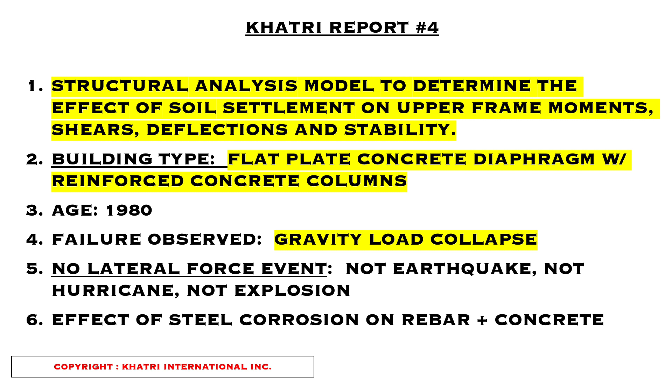And so I did this analysis mainly out of curiosity and also to follow up on a hunch that I had about 2 months ago after visiting the site, that what would happen to the building if a column were to sink. And so I did a very simplified model. I'll show it to you and share the results with you. That's the purpose of today's presentation.

And so report number 3, we discussed the effect of corrosion on steel and concrete. We discussed what could happen to the footing with a concrete pile cap. We discussed the column slab connection. Today we're going to look at what happens to the shears and moments from the rotation of a foundation settlement and the effect of settlement itself, the vertical movement of a particular column. How does it affect the rest of the building?

The results from today's analysis, it's a very simplified analysis. It's just a single frame, one story, but it has application to buildings worldwide, because the principle of the analysis shows, and you'll see it in a moment, what happens when a building settles and how does it affect the structural performance of the rest of the building.

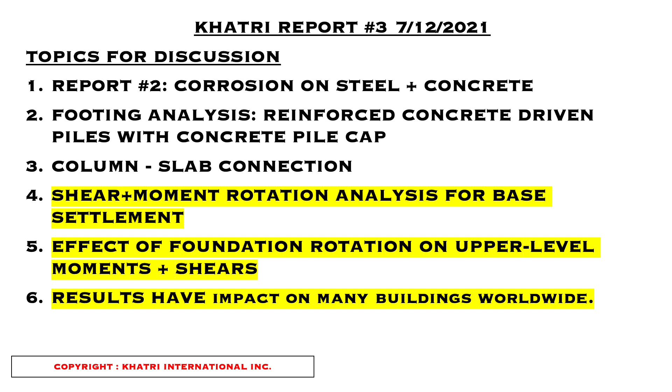We start by looking at a very simple model of a single portal frame. This is a simple moment frame system. We all studied this in college many times in our undergraduate program. And what we're going to do with this portal frame is do a very simple analysis where we will try to destabilize the frame by allowing one joint to slip.

So in the top of the diagram you see case A, which is a traditional fixed base model. In this particular case I have modeled exactly the loads that I calculated from the Champlain building for a typical tributary frame with the dimensions that I got from the plans. You have a dead load and live load on the top part of the frame for the level 1, and then you have axial loads upwards of 600,000 pounds coming from the 13 floors up above.

And you have joint A and joint D are fixed base. You see that in case A with a rigid frame. And that's a traditional analysis. That is what structural engineers do on designing buildings like this. We do the case A analysis and we design the building based upon that.

We assume throughout the life of the structure that joints A and D will never move, that they will remain stable. And that obviously is not happening, not just on this building, but is not happening throughout. As a forensic engineer, I can tell you that the joints are moving.

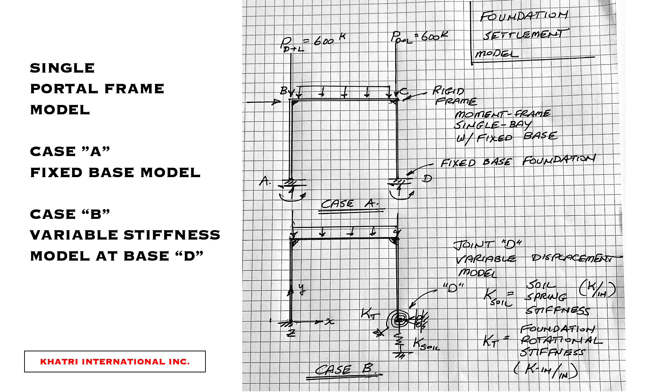Vertical stiffness is modeled using a linear elastic stiffness model. In this graph, I've shown schematically how that stiffness really looks. On the vertical axis, you have the vertical compression force on the column acting downward on the footing. Everything here is positive, but obviously in the actual model, it would be a negative deflection.

The delta Y on the horizontal axis is the vertical deflection, and the dashed line represents the actual nonlinear soil stiffness model, which most soils are very nonlinear. And we're approximating that using an ideal linear elastic curve because hopefully we never reach the nonlinear behavior. So most of our deflection will be occurring on the very far left of the diagram where the linear elastic stiffness modulus is applicable. That number would come from a soils engineer.

In the structural model, we assume that K soil is infinity. We assume it's perfectly elastically rigid, which I am now removing that assumption and putting in some linear elastic model, and I'm varying that linear elastic K modulus and degrading it. In other words, I'm starting from a very high number and then I'm reducing it until we get deflection. And then I'm seeing what happens in the structure, what happens to the moments.

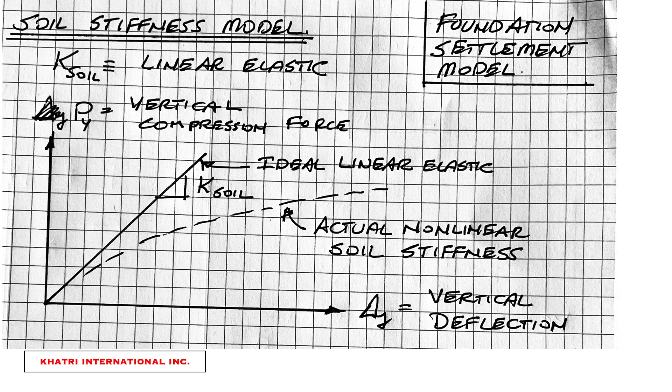And the rotational stiffness, which is the coil spring, same idea. The actual soil is highly nonlinear, and here we have on the vertical axis the moment rotation relationship, the rotational moment in kip inches versus the rotation of the foundation measured in radians. No specific numbers here because I'm only doing this analysis really to see, varying the numbers from infinity and degrading the rotational stiffness down to the point where we get some rotation, some deflection, the effect of rotational stiffness degradation on the frame.

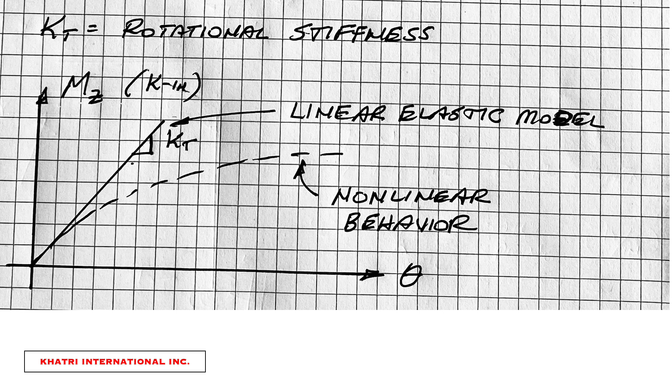What happens when joint D loses its fixity and that joint is allowed to rotate? How does that affect the other column joints? That's the purpose of today's analysis.

This is case A, which is the standard case. Fixed base model. This is done all the time. The program we're using here is RISA 3D. It's a two-dimensional model. And you can see everything is nicely symmetrically distributed. You can see the loads are 50% shared between the two base joints. The moment diagram is very symmetrical.

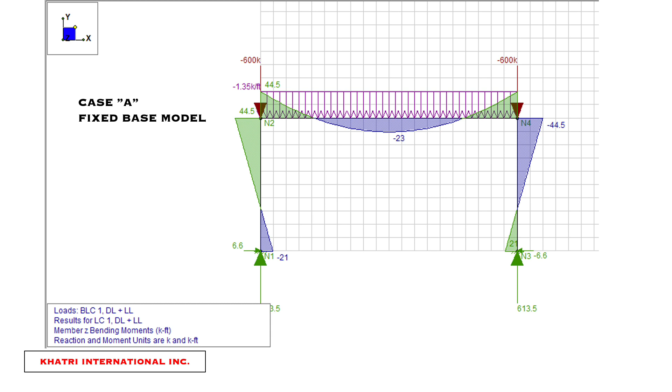But pay attention to the numbers here. I want you to look at the left corner where you see the moment of 44.5 foot kips. Pay attention to that and pay attention to the moment on the right, which is symmetrical, and see what happens as we start to move the lower right joint, letter D, downward.

In this analysis, I have reduced the stiffness in joint D, which is the lower right joint, and you see the deflections there. We're getting about 1.25 inches of deflection in node number 4, which is joint D on my diagram. And see what's happening to the moment diagram. The moment diagram has gone asymmetrical. The moment on the far left is now 58.1, whereas before it was 45, so it's increased substantially. The moment on the right joint has dropped from 45 to 31.

And what this is telling us, which I did sort of predict, is that it makes physical sense that when one leg starts to weaken, the other leg takes more load. And so that fits with human expectation. If you are walking with two legs and your one leg is hurt, your other leg is going to pick up the load. It's simple physics. The building will redistribute the axial loads and redistribute the stresses to the stronger remaining leg. Makes sense, and that's exactly what's happening here.

The problem that you have with this is that that joint on the far left is not designed for those higher moments. It was designed for a static equilibrium condition that was symmetrical. And this is where the problem occurs, because when you have the redistribution of the stress, the new loads are higher than what was there before, and now that deflection in that column is affecting the rest of the building, which will lead to instability.

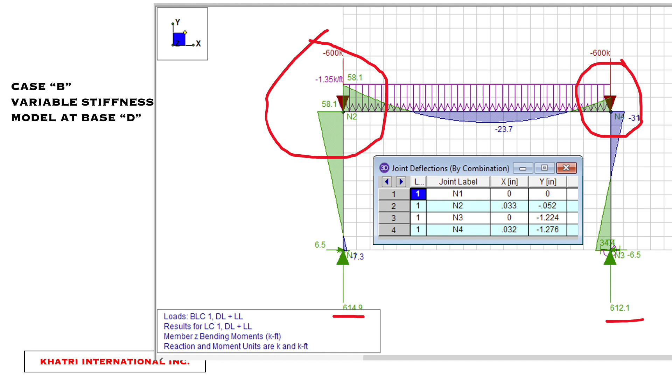And we are getting horizontal deflections, as you can see. Look at the X dimension there. We're getting horizontal drift that's occurring in the frame. So the frame is drifting to the right, which will lead to a P delta effect. Now in this case, it may be okay with only 1.25 inch deflection, but it can easily get out of hand. You'll see in the next slide.

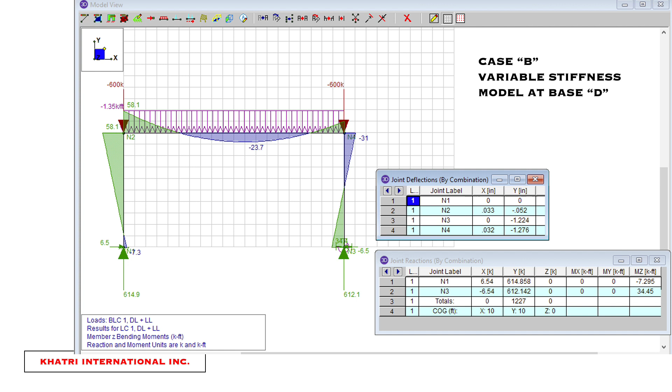This is the same case, case B. Here we have the same deflections. I've printed for you another slide down at the bottom which shows the moment redistribution. And again, you're getting asymmetry. You can see the moment diagram on the far left column has shifted dramatically, and the loads have gone up, which puts extra strain on that beam column connection, and also it affects the shear diagram as well.

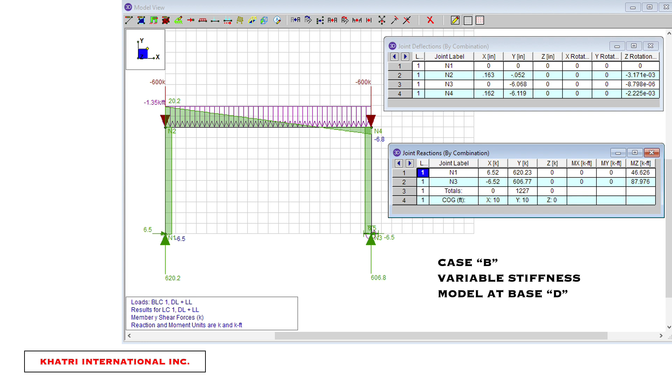This is the shear diagram. You can see the shears are no longer symmetrical, and the same thing is happening with the moments. Between the two, the vertical deflection has a more dramatic impact on the moments and the stresses than the rotational stiffness, but they're both bad, and they both lead to unstable structure.

This is a schematic diagram of the pile cap rotation, where we have the column coming in, there's a pile cap, and I've schematically shown here what happens when you have cap rotation, what happens when you have vertical deflection. These are the components that can and should be measured in a building. If we are having this issue occurring in any building, it will demonstrate itself somewhere on a diagram like this,

which can be measured. And so measurements to see if the building is deflecting are highly valuable, because that will tell us whether or not the building is sinking, if it's sinking by how much, and that will give us a prediction of what the stress increase is in the columns. Even though the analysis that I've done is a single portal frame, it's a simple frame, it applies to a multi-story structure just as well. It probably will show worse in a multi-story structure because you have multiple levels.

But the structural principle that I'm driving home today is that deflections matter. They matter a lot. And they're not in the code, and they're not considered in design, and they're not part of our general practice of engineering. They're not within the normal bandwidth, if you will, of what's defined as generally accepted professional practice. Definitely not. Maybe it should be, but that's a new discussion that will have to be looked at on the coming horizon.

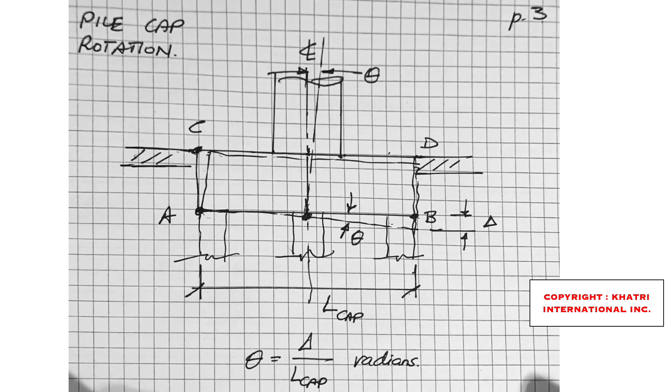In this simplified analysis, we can conclude that foundation settlement will affect the column, slab, and beam moments. That's clearly obvious. It will affect the P delta due to the lateral translation. At some point, there will be extra P delta moments introduced to those columns. Vertical settlement downward increases the moments in the upper moment joints, for sure. And it will lead, at some point, to structural instability and eventual collapse.

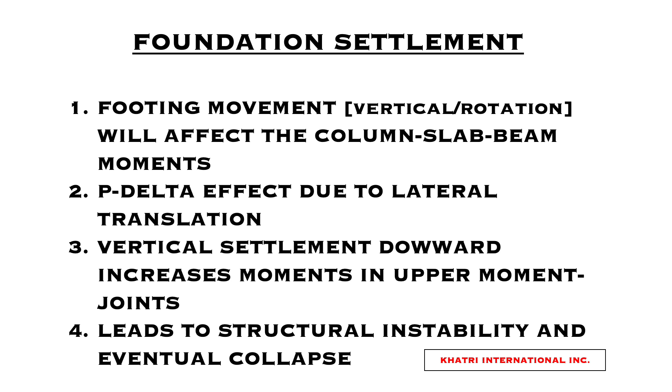How much depends on the building, depends on the type. There are no rules of thumb here. This is new territory that we're in. We're looking at something that really hasn't been examined before, and it requires some attention. And the best that we can do as structural engineers in working for our clients is to do this analysis on a case-by-case basis and do very accurate measurements of the building to see if the building is moving. If the building is moving, then the next question is by how much? And then we can see whether or not it's detrimental or can it be ignored.

The conclusions presented today apply to a multi-story model. A multi-story model would look something like this, where you would have a variable stiffness foundation, basically an elastic foundation, except an elastic foundation has a continuous modulus at the base. In this case, we would be degrading certain springs and leaving other springs rigid, or in other words, allowing for variable deflection.

And that's where things start to get really complicated, because which column is moving, how much is it moving, is the building sinking in one direction, is it sinking towards the center? That's the part that we don't know. That's the part that we have to measure. But it definitely impacts all of the joints, all of the frames. It impacts the stresses in the building. And it does cause problems, and it is a structural concern.

Whether or not this is a root cause of what happened in Champlain remains to be seen. We have to wait and see with more data and see what the official investigation reveals. But based on what I've done here today, I think we can definitely shed light on something here that needs immediate attention on all of the other buildings that are similar to Champlain that require some form of structural investigation.

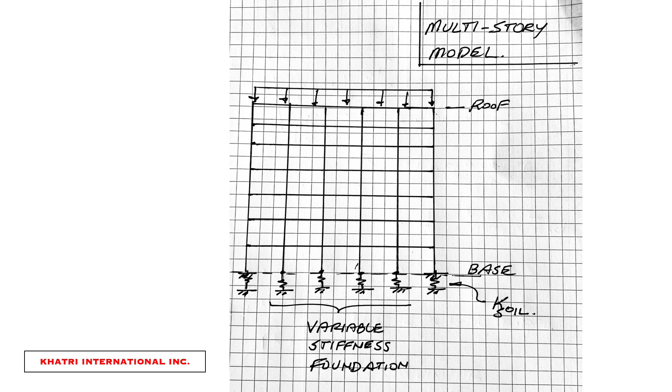I've included this slide, which was in my third report, just as a recap to explain how the pile foundation system works. In the case of Champlain, it was built using skin friction piles, where the friction between the piles and the soil is the governing load path. And if that skin friction slips, then you have problems.

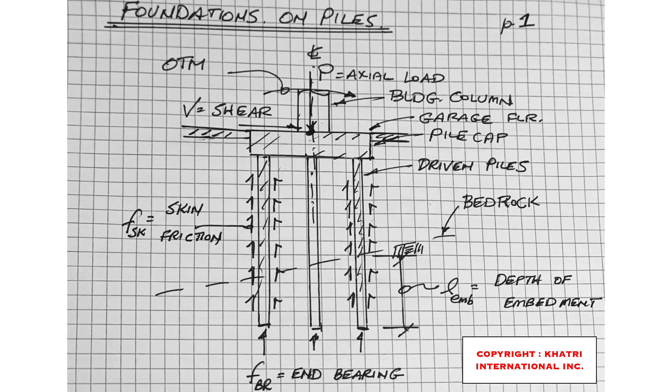We have a terrible example of this occurring in San Francisco right now with the Millennium Tower that is sinking and tilting. And it's exactly the same situation as this diagram, except that in my diagram here, the piles went into bedrock. In the Millennium Tower, the piles did not go to bedrock. And that is probably a much more complicated situation, but the principle is the same, that as the building continues to sink, it has a dramatic impact. It has a detrimental impact on the structure above.

And so if we were to have just even modest deflections, it will cause column rotation at the garage level. It will cause distortion of the column on the first floor. It will aggravate P-delta moments, which potentially lead to buckling and instability failure, and it will be weakening the upper story columns. Now, that mathematical equation of how much deflection and how it relates to the upper story columns gets rather detailed, and I am looking at that right now. I will produce some analysis on that and share that with you in the coming weeks.

But this is a consideration that is not considered in conventional design and is potentially a very strong root cause failure that could have happened. I'm not saying it did happen. I'm not saying it's definite because I don't have enough information. But I've done enough work in this industry on different types of tall structures that I can certainly consider this to be a potential contributing cause of collapse.

And it's something that we need to look at as engineers that are working in this industry. We do need to look at this on other existing buildings, because this is a point of failure that can be measured. This is a root cause that can be measured in the field, and we can document it, and we can potentially predict a collapse before it occurs. Because if a building is sinking non-uniformly and the caps are rotating, we can measure that using instrumentation, and then we can tell our clients whether or not their building is shifting.

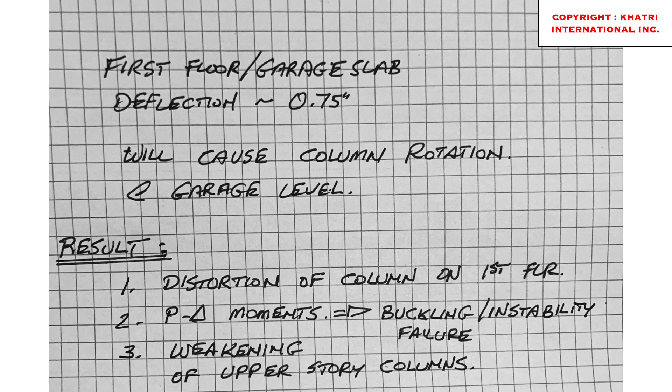And then part two is we will check the column alignments. The column alignments are very important. Obviously, if a column is not vertical or a column is distorting, that's a cause for concern. Now, it could be that those columns were not aligned to begin with. No building is built perfectly straight and square. I understand that, and we have to accept that. But there are tolerance requirements. There are tolerances that we can check it against.

And this is the area where I think we as structural engineers should be looking at this when we're called in to look at a building. How do we know whether or not that building is potentially in a collapse mode, may have already started to collapse and we haven't noticed it? This is an analytical procedure that we can do in the field to measure and see whether or not that building is moving. And I highly advise that we do this as part of our scope.

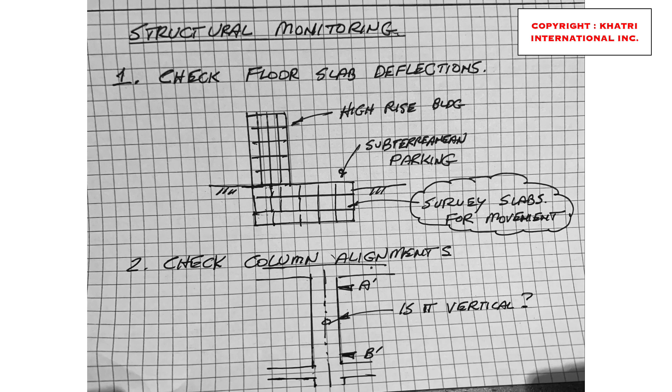For report number 4, my conclusions, which follow through with reports number 2 and 3: foundation and footing settlement is a potential cause of failure. We do not know for Champlain without any measured data. Structural monitoring is essential. We've got to monitor our buildings. We've got to look at the column alignment. We've got to look at slab deflections. This is very important to keep track of our structures like in this category, so that we can at least take either precautionary or mitigation moves, or at least issue a warning to occupants that this building is dangerous.